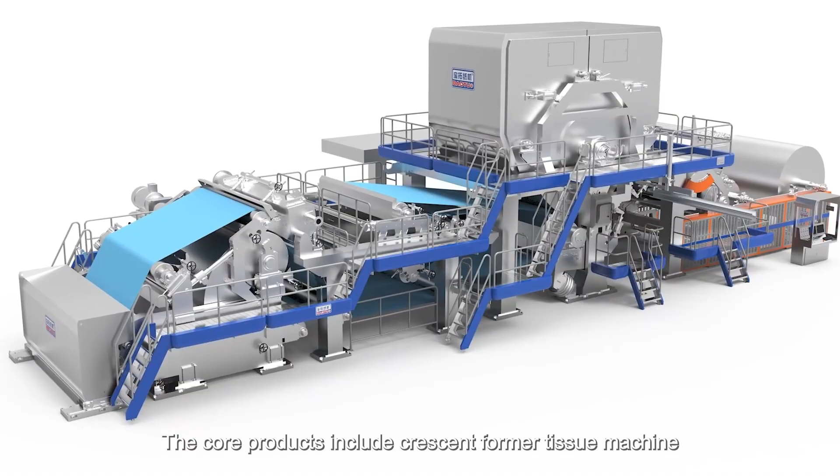Baotuo Company was established in 2007. It is a national high-tech enterprise under Baotuo Enterprise Group, which integrates paper-making equipment research and development, manufacturing, sales, installation, and commissioning services. The core products include Crescent Former Tissue Machine, Section Former Tissue Machine, Fourdrinier Twin Dryer Tower Machine, TAD Hot Air Penetration Multifunctional Tissue Machine, and Textured Tissue Machine.

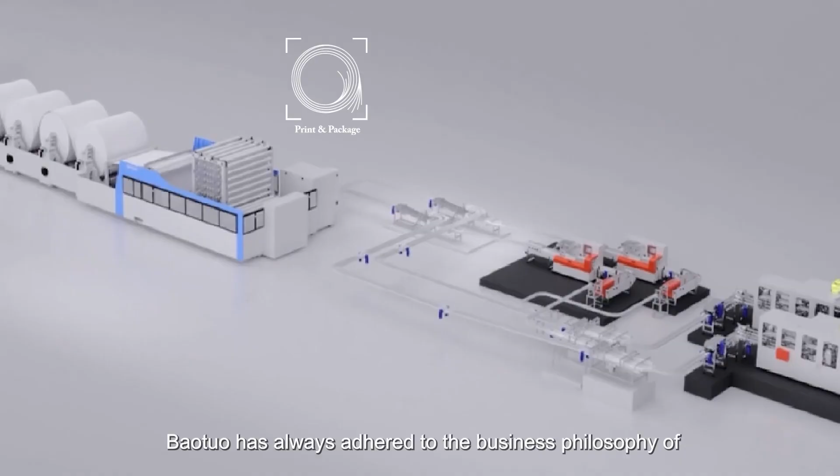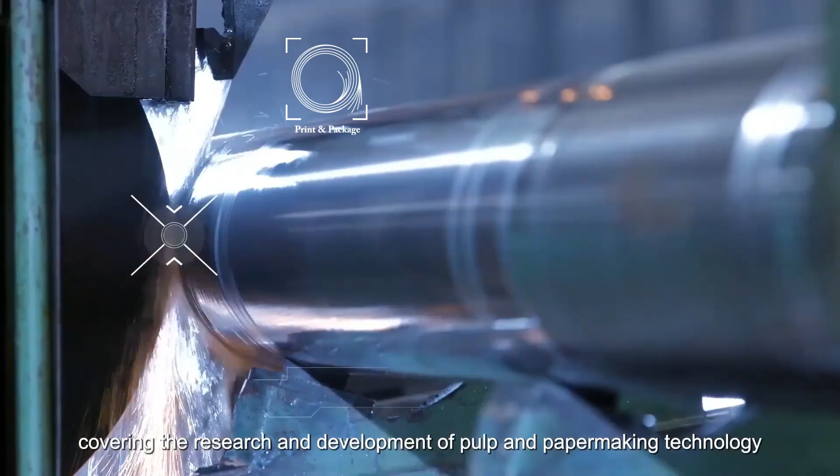Since its establishment, Baotuo has always adhered to the business philosophy of science and technology as treasure, innovation and development, constantly absorbing and learning from the world's advanced technology, while also making independent innovations. It has more than 80 patents covering the research and development of pulp and paper making technology, the development of complete paper making equipment and core key components.

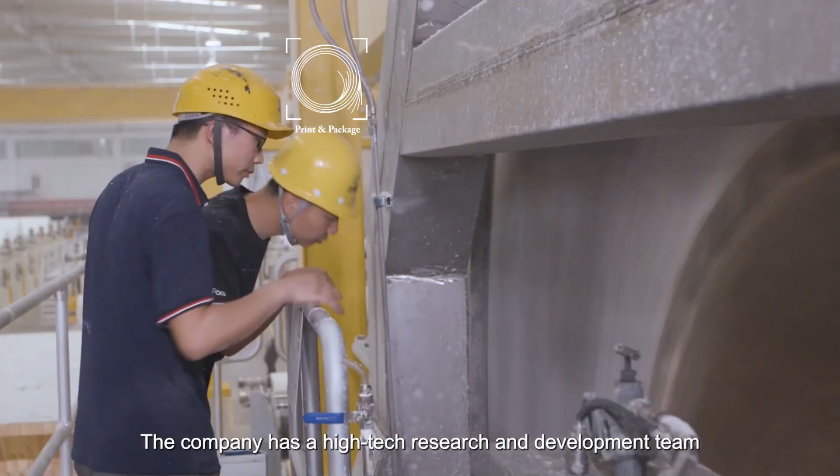In 2022, Baotuo Company was honored as National Invisible Champion of Nanhai Manufacturing Industry. The company has a high-tech research and development team, more than 200 sets of successful experience in paper machine projects, focusing on continuous research and development and upgrading of paper-making equipment and processes, and has won a lot of praise and trust from customers at home and abroad.

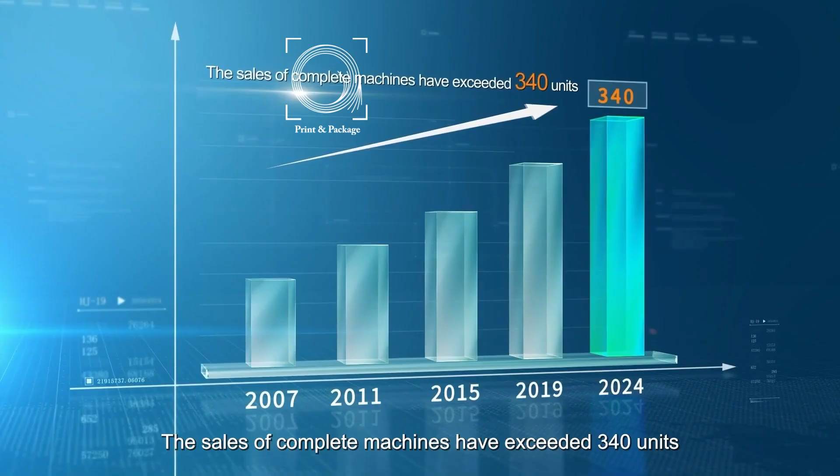The sales of complete machines have exceeded 340 units, and the annual output of total installed machines has reached 5.6 million tons. Baotuo ranks third in global market share of main tissue machine suppliers from 2000 to 2025.

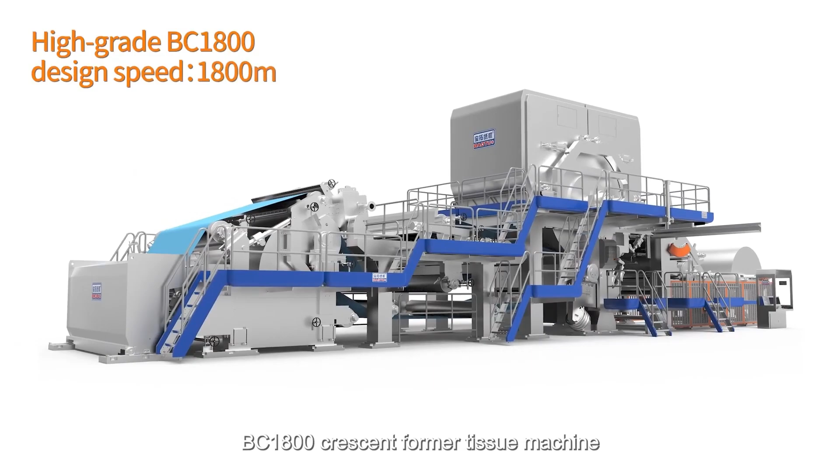At the beginning of 2021, Baotuo developed and launched the high-grade BC1800 Crescent Former Tissue Machine. The design speed of this machine is 1800 meters per minute. The base paper width is 2,850 to 5,600 millimeters. The production weight is 11 to 42 grams per square meter. The maximum annual output can reach 55,000 tons.

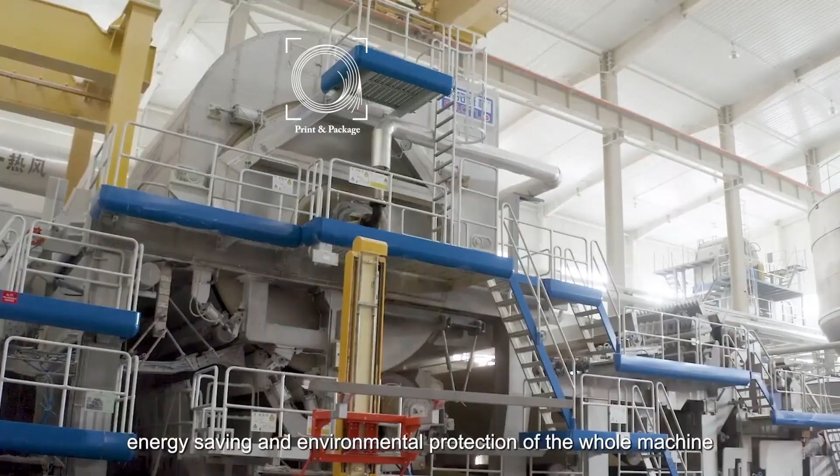This model has been put into production in Hengan Group, Zhongshun Group, Sun Group, Asia Pacific, and other domestic large-scale household paper enterprises. The operation performance, product quality, energy saving, and environmental protection of the whole machine have been highly praised by experts and customers. The performance has reached the international advanced level.

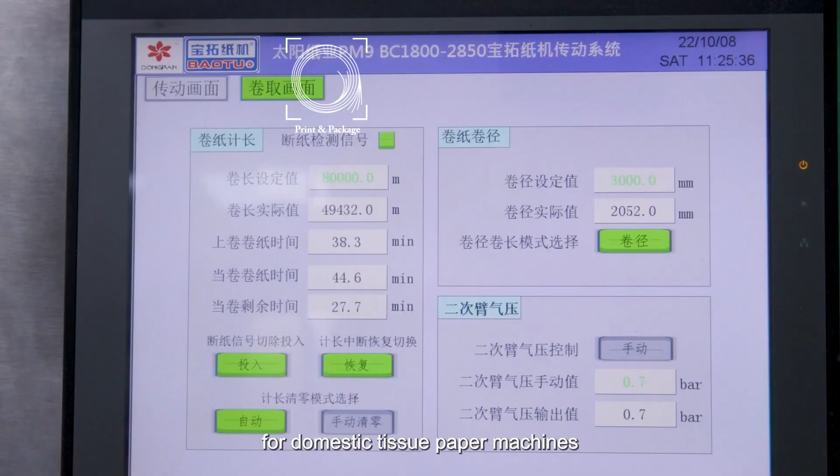Guangxi Sun Paper ordered 2 BC1800-2850 Crescent paper machine production lines from our company, which have been successfully put into production in July 2022. In less than a month, the operating speed of the paper machine broke through 1,700 meters per minute, creating the highest operating speed record for domestic tissue paper machines. The successful operation of this project has filled the vacancy in the domestic industry and created a wide range of social and economic benefits. The production line consists of pulp preparation and main tissue machine.

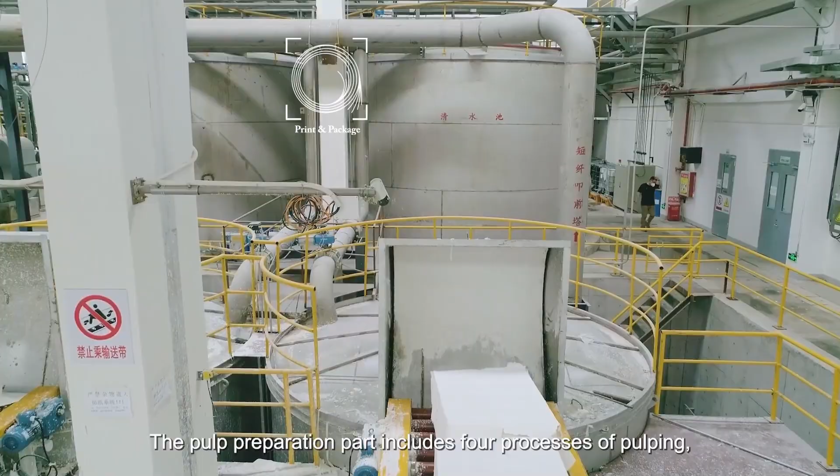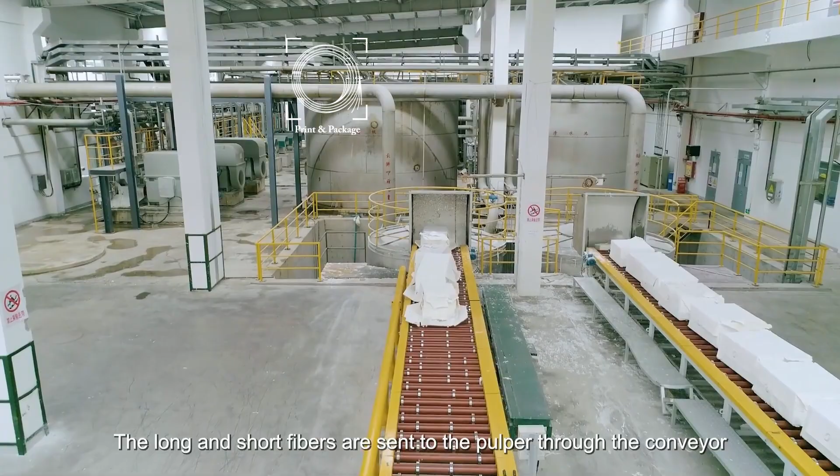1. Pulp preparation. The pulp preparation part includes 4 processes: pulping, sand removal, pulp refining, and pulp blending. Pulping: the long and short fibers are sent to the pulper through the conveyor. Under the power of the pulper impeller, the pulp in the tank is sucked along the center of the axis.

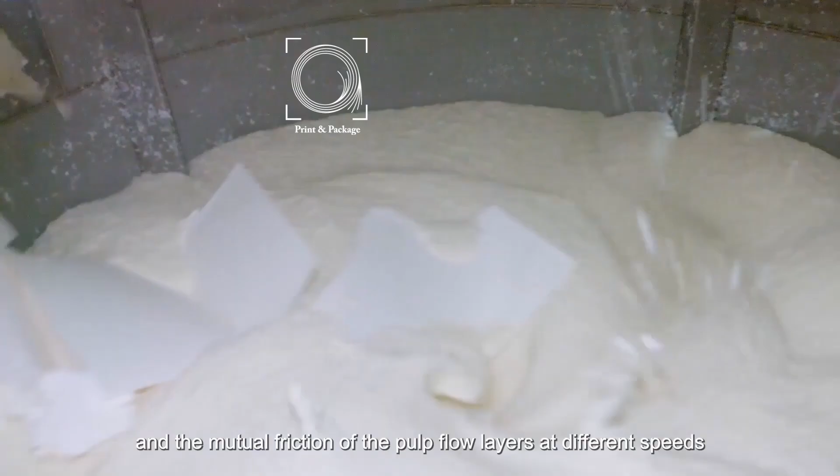The pulp is thrown out from the circumference at high speed, forming a violent, turbulent cycle due to the tearing of the pulp plate by the impeller and the mutual friction of the pulp flow layers at different speeds. The purpose of pulp separation is achieved. The pulping concentration and pulping time determine the degree of disentanglement of the pulp. The crushed pulp is sent to the pulp tower before the beating through the pulp pump.

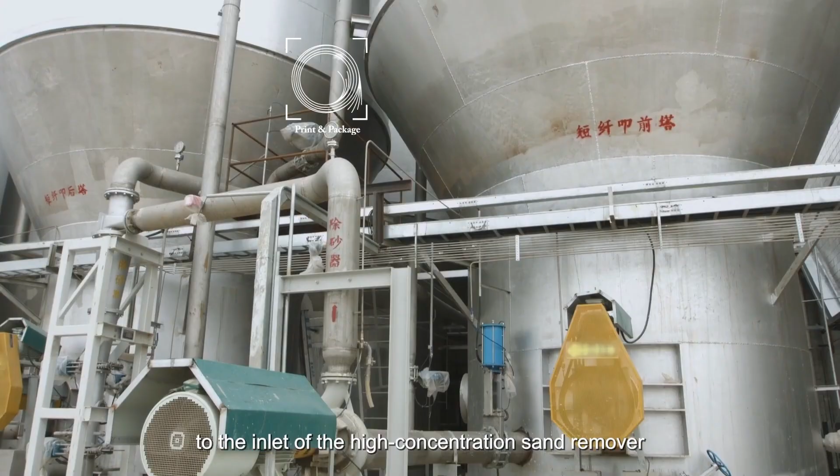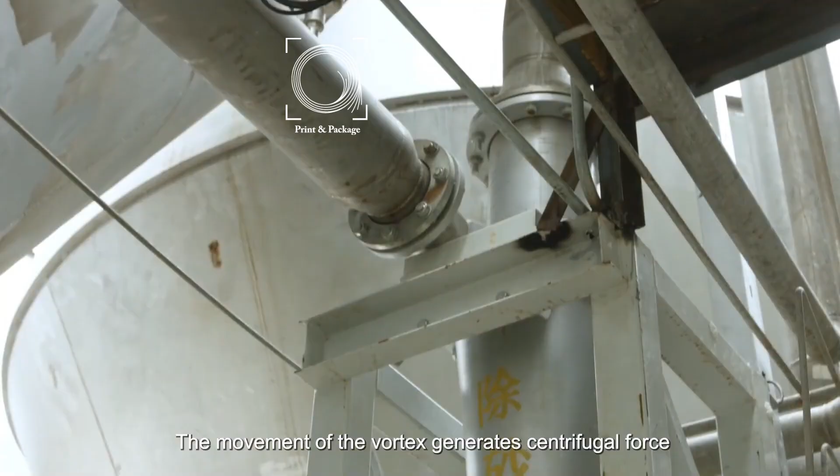Sand removal: the slurry is transported tangentially to the inlet of the high-concentration sand remover. The slurry moves in a vortex and accelerates downward along the cone of the cleaner in a spiral shape. The movement of the vortex generates centrifugal force. Impurities heavier than water move to the inner wall of the slag cleaner and drop to the sand removal port, while the good pulp with a density lower than water moves to the core of the vortex and is sent from the good pulp outlet to the next process, refining.

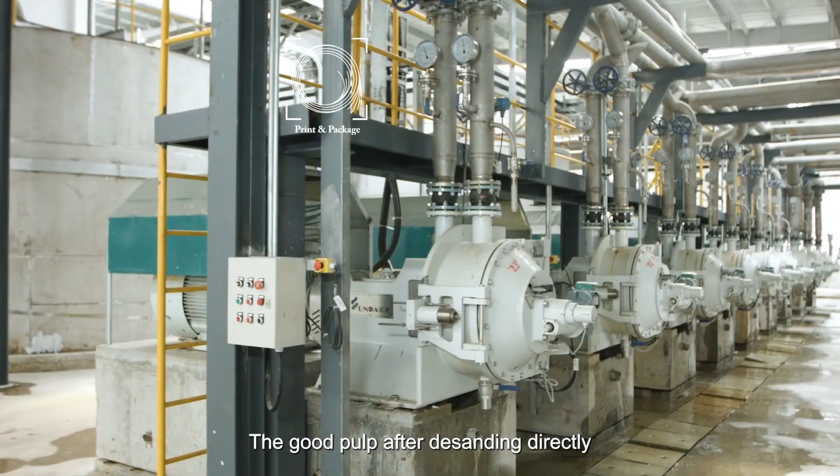The good pulp, after desanding directly, enters the grinding area of the refiner. The beating process is completed through the rubbing and extrusion of the tooth disc in the grinding area, and the pulp after grinding enters the beating tower. According to the refining capacity, refining power and refining concentration are important factors to determine the degree of beating.

Pulp blending: the tapped pulp and multi-disc recovered pulp are pumped to the pulp blending tower according to the production process ratio. After mixing evenly in the slurry mixing tower, it is transferred to the front tower through the slurry pump. 2. Paper machine part.

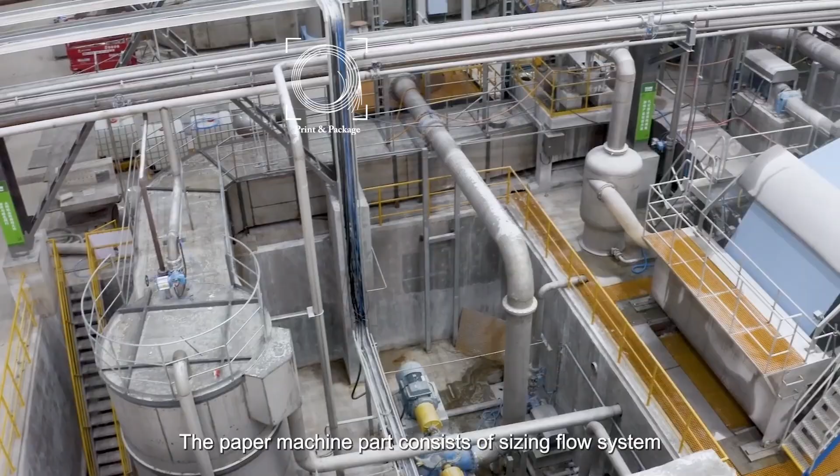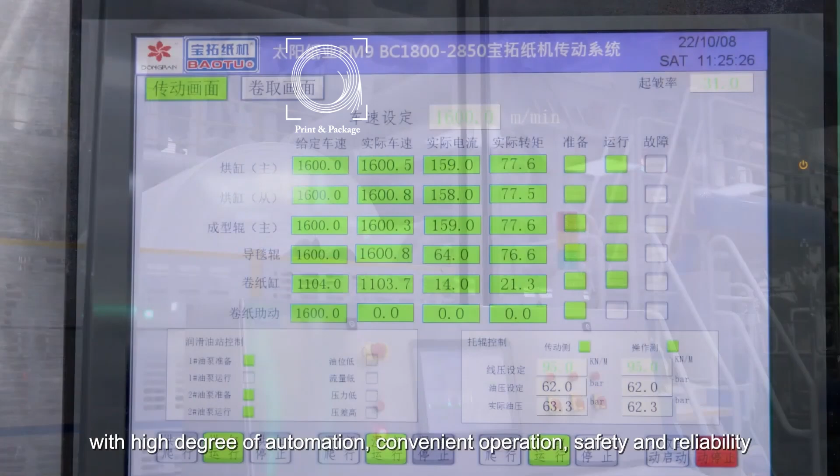The paper machine part consists of sizing flow system, head box, crescent former, press section, steel dryer, air hood and heat recovery system, dryer cylinder scraper, rewinder, lubrication system, hydraulic control system, main drive control system, and vacuum system. The whole machine is controlled by DCS with a high degree of automation, convenient operation, safety and reliability.

Sizing flow delivery system. The sizing flow delivery system consists of sizing pump, flushing pump, pressure screen, second stage screen, and white water tower outside the machine.

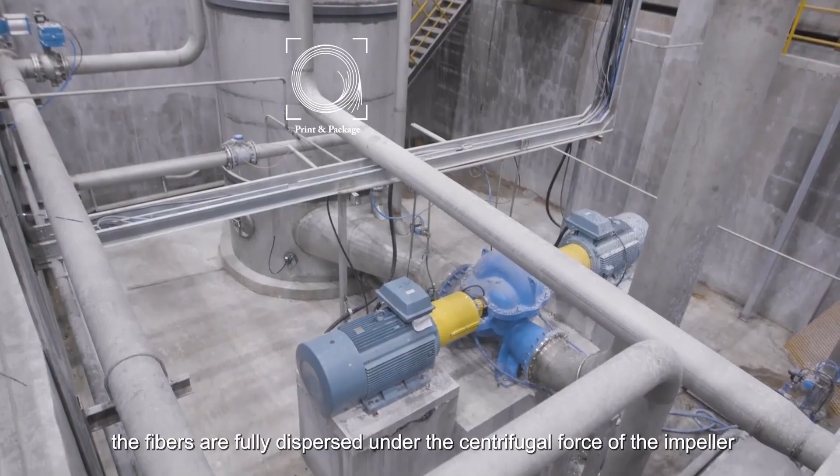The slurry in the forebay is sent to the inlet of the slurry pump after thickening. After the pump is mixed and diluted with white water outside the machine, the fibers are fully dispersed under the centrifugal force of the impeller of the pulp pump and then enter the pressure screen. The good pulp, after the pressure screen treatment, finally enters the head box.

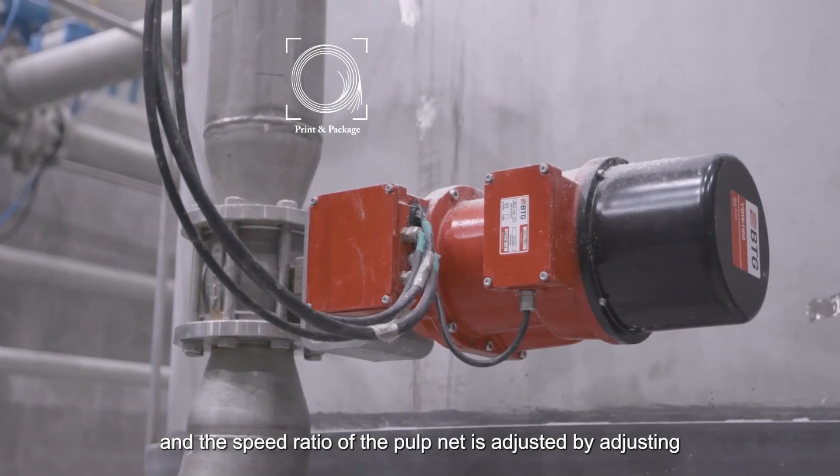The pulp pump is controlled by frequency conversion, and the speed ratio of the pulp net is adjusted by adjusting the frequency of the pulp pump to meet the evenness of the base paper and the vertical and horizontal tensile strength.

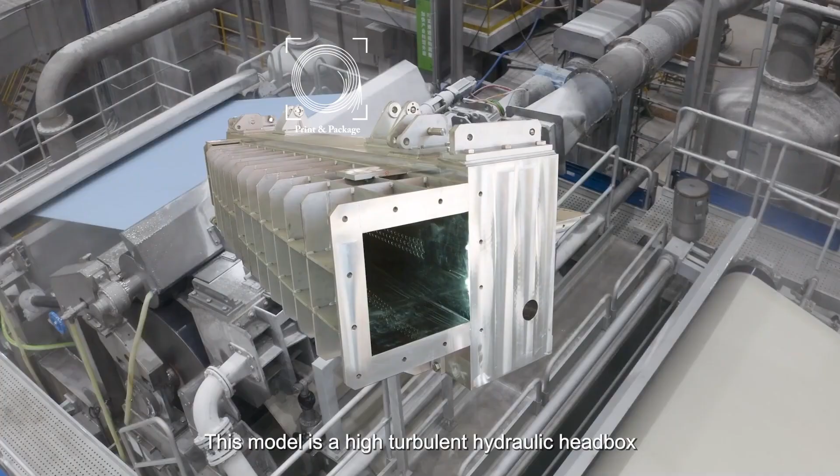Head box. The head box is the heart of the paper machine, the key component of the paper machine, and the hub connecting the flow delivery part and the forming part. This model is a high turbulent hydraulic head box composed of three parts: pulp distributor, rectification unit, and net-entering device.

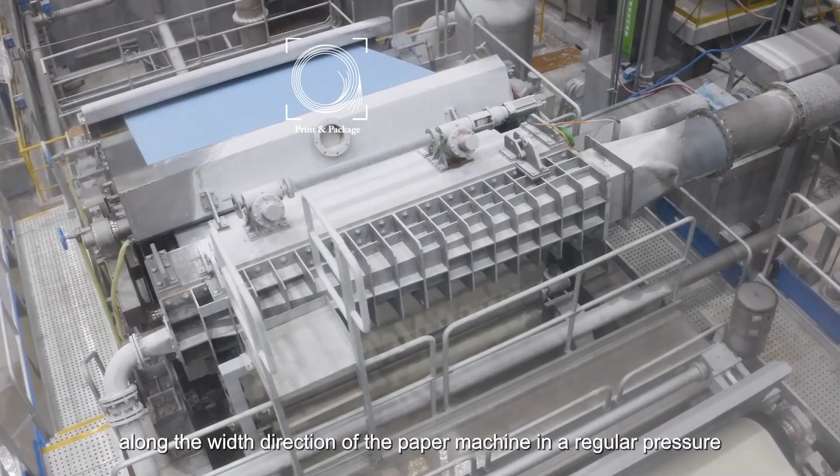According to the principle of fluid dynamics, the pulp distributor uses a regular variable cross-section to distribute the net paper material flow along the width direction of the paper machine in a regular pressure, speed, and flow rate.

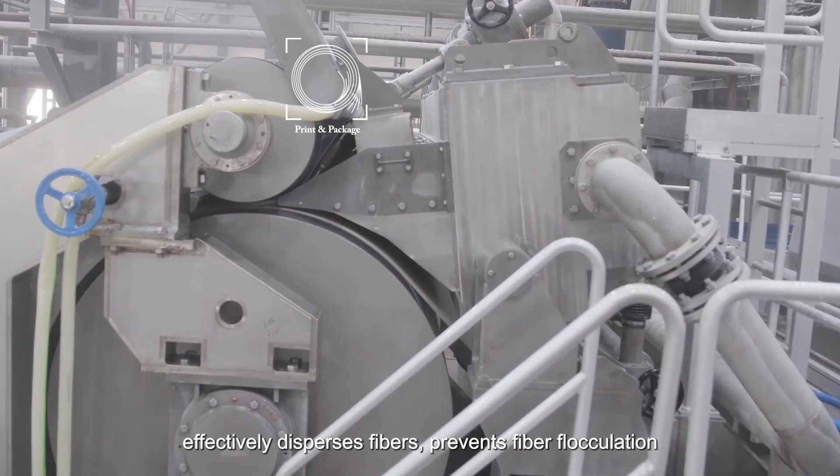The rectifying part uses rectifying elements and turbulence generators to generate turbulence of appropriate scale and intensity, effectively disperses fibers, prevents fiber flocculation, keeps fibers in a random arrangement as much as possible, and keeps fibers in the web material flow in a uniformly dispersed state.

The paper material feeding device spreads the slurry evenly to the predetermined network point at the best spraying speed. The parts in contact with the headbox and the slurry are all made of stainless steel 316. The main flow parts of the head box are processed and formed at one time by the pentahedron machining center.

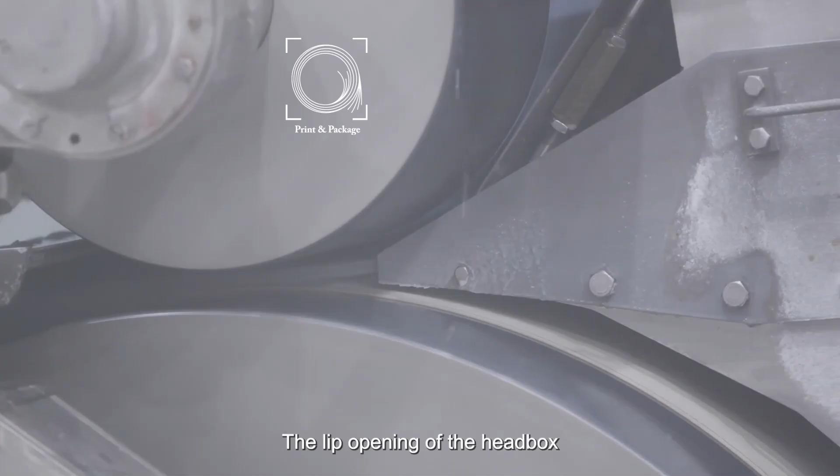The lip opening of the head box and the return flow of the head box are controlled electrically. The landing point of the head box is adjusted online by a worm gear. The head box can be adjusted online to meet the quantitative requirements of the base paper.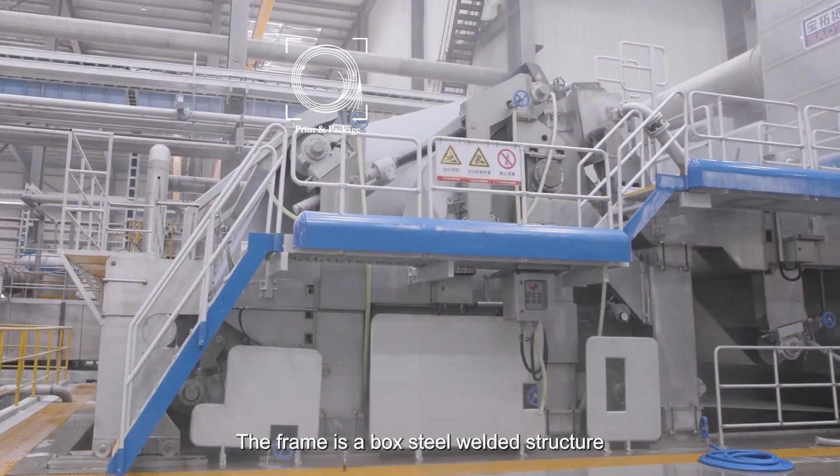Crescent former. The crescent former adopts four-roller cantilever structure. The frame is a box steel, welded structure, and the vertical and horizontal beams and the frame base are covered with stainless steel. The wire section adopts the electric method to tension and relax the forming wire.

It is equipped with a constant tension device to ensure the stability of the tension during the running of the wire, and adopts the pneumatic method to automatically correct the deviation of the polyester wire.

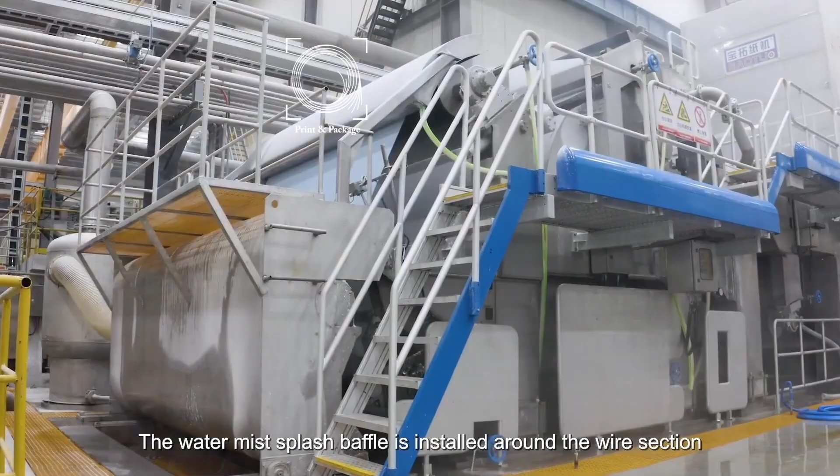The water receiving tray under the net is equipped with a curved deflector, which can eliminate part of the foam in the white water. The water mist splash baffle is installed around the wire section, and the rear of the forming section is equipped with a movable adjustable water cover, which is connected with the dehumidification system so as to improve the operating environment of the workshop.

Felt press section. The felt section includes forming rollers, vacuum rollers, felt guide rollers, vacuum section boxes, felt correction devices, felt tensioning devices, guide roller scrapers, high and low pressure spring systems, etc.

The frame is a box steel welded structure, and the vertical and horizontal beams and the frame base are covered with stainless steel. The forming roller frame has a cantilever design.

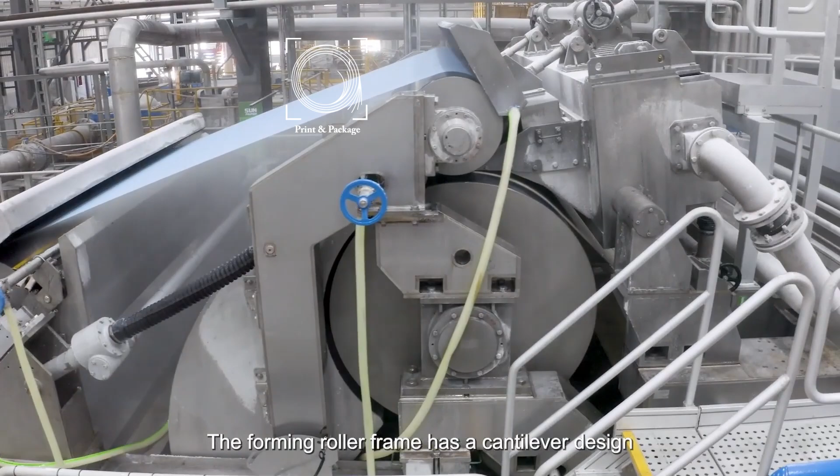When changing a blanket, use a hydraulic jack to lift the operating side frame and take out the plug block, and then the blanket can be changed directly, which effectively reduces the labor intensity of employees and saves the time for changing blankets. The forming roller adopts a large diameter,

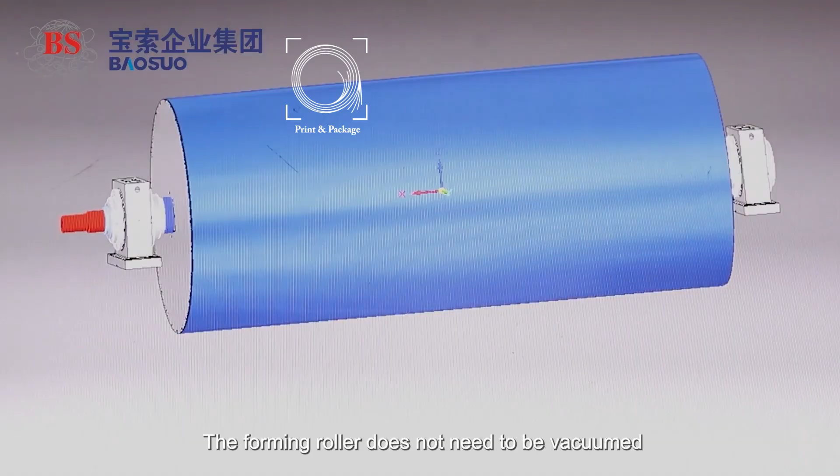1,500 millimeters, grooved roller body to increase the dehydration capacity of the wet part. The roller body is rolled and welded by steel plate, and the inside and outside are finished to meet the requirements of dynamic balance. The forming roller does not need to be vacuumed and is naturally dehydrated by centrifugal force, so as to achieve the purpose of energy saving.

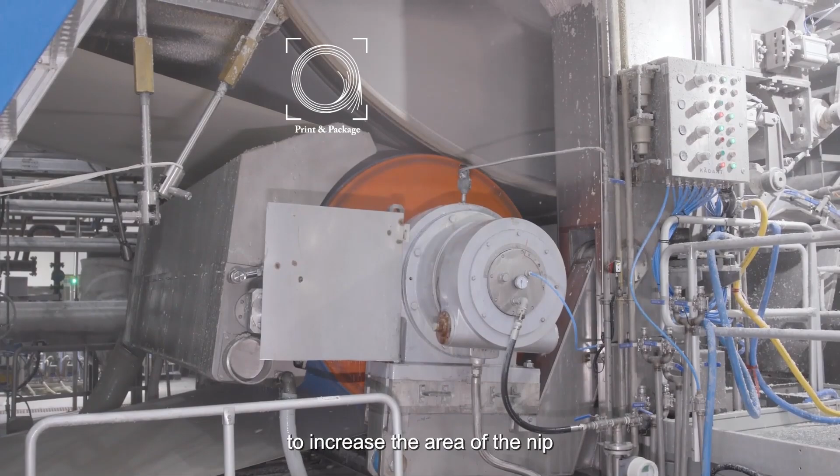The vacuum roller adopts a large diameter, 1,450 millimeters roller body to increase the area of the nip. The width of the nip reaches 46 millimeters, and the dryness of the upper cylinder is guaranteed to be above 40%. The application of large diameter vacuum rollers can not only reduce steam consumption, but also increase the bulk of the finished paper.

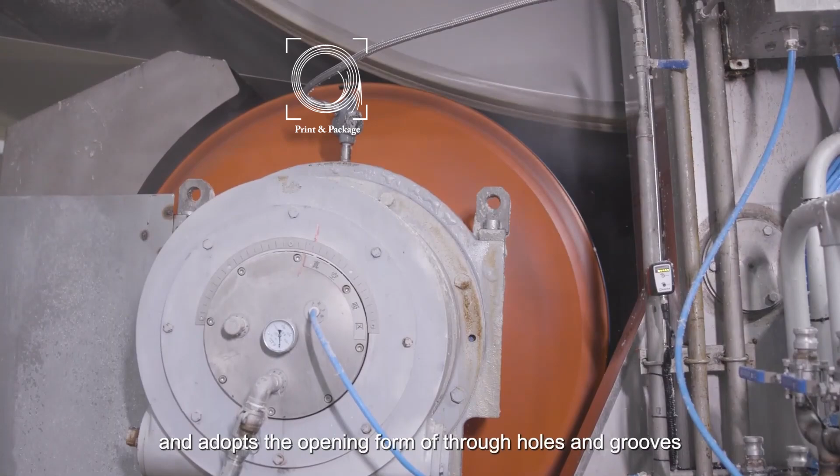The roller body and the core body are all made of stainless steel. The roll-covering rubber is made of imported polyurethane material and adopts the opening form of through holes and grooves.

The opening rate of the rubber surface reaches more than 20%, which increases the dehydration capacity. The roller seals are made of imported graphite-dense material, which effectively reduces the resistance caused by the friction between the roller shell and the seals, effectively reduces the operating load of the main drive of the paper machine, and prolongs the service life of the rollers.

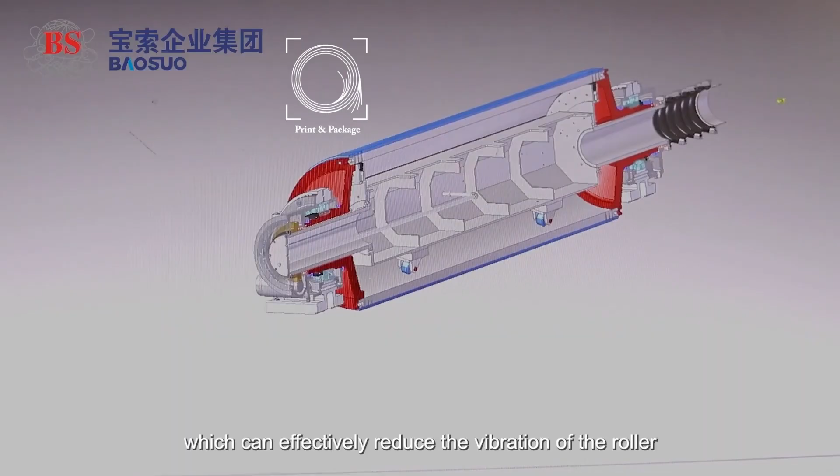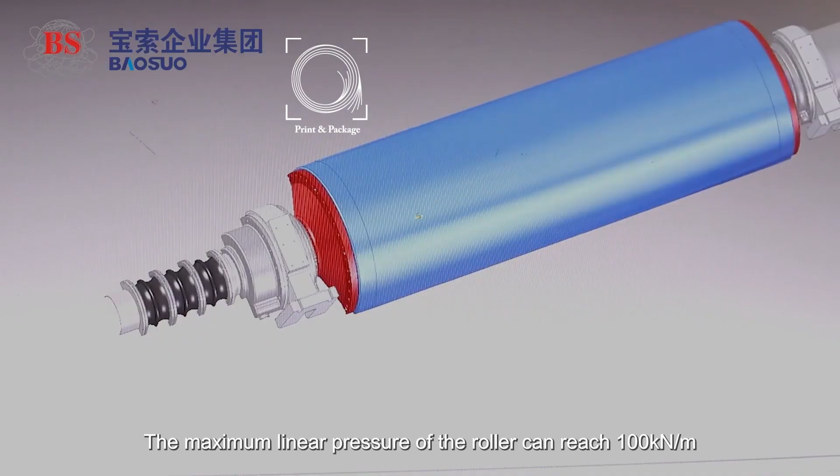The vacuum roller adopts a hydraulic loading method, which can effectively reduce the vibration of the roller and provide a strong guarantee for the stable operation of the paper machine. The maximum linear pressure of the roller can reach 100 kilonewtons per meter, which effectively improves the dryness of the upper cylinder of the paper sheet.

The vacuum roller adopts the design of the double scraper structure water tray, which solves the problem of paper sheet rewetting and improves the dryness of the paper sheet upper cylinder.

The blanket suction box adopts a ceramic panel, which reduces the friction between the blanket and the panel, thereby improving the service life of the blanket and the panel of the vacuum suction box.

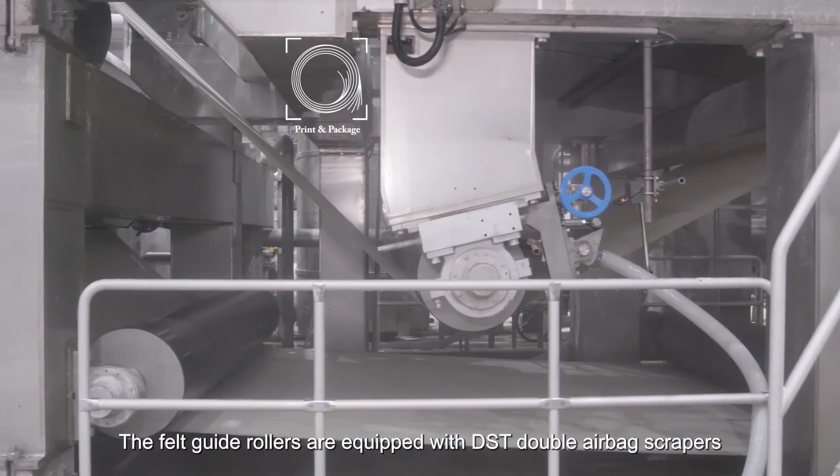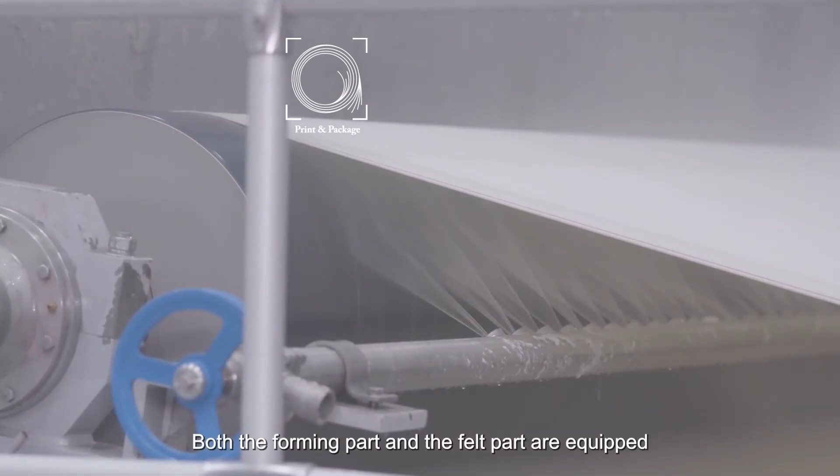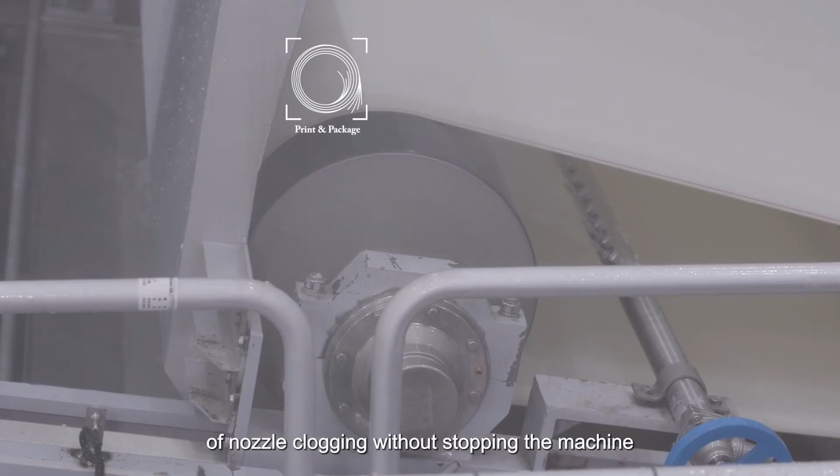Both the forming part and the felt part are equipped with high and low pressure brushable spray pipes. It can effectively solve the problem of nozzle clogging without stopping the machine. It effectively guarantees the cleanliness, air permeability, and water content of the net blanket, so that the net blanket always maintains a good dehydration state. It not only improves the service life of the net blanket, but also reduces the cleaning frequency of the net blanket and improves the operating efficiency of the paper machine.

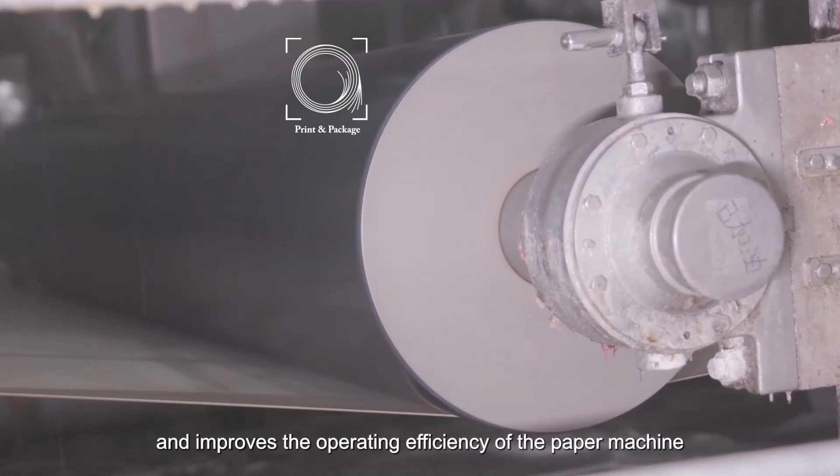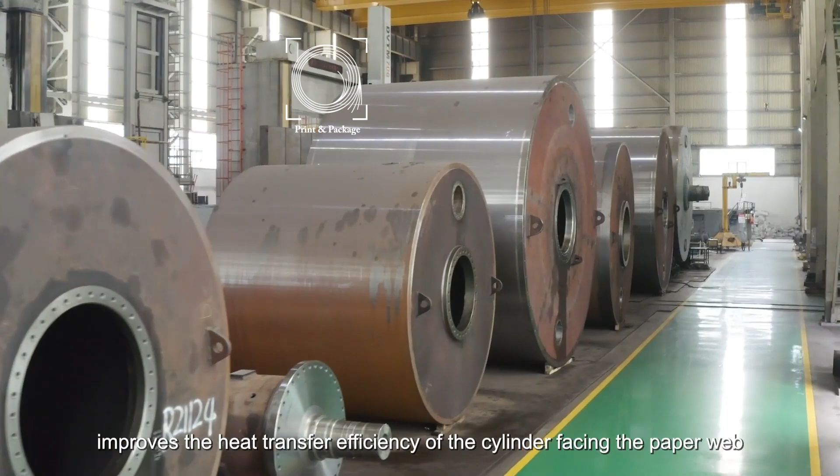Steel drying cylinder: the paper machine is equipped with a steel drying cylinder with a diameter of 4,877 millimeters. The cylinder body is made of Q345R steel plate with a groove design inside, which reduces the area occupied by condensed water, improves the heat transfer efficiency of the cylinder facing the paper web, and effectively reduces the steam consumption. The cylinder surface is sprayed with imported special alloy.

The Rockwell hardness of the cylinder surface is in the range of 55 to 65. Under normal use, the metal-coated cylinder surface does not need maintenance within 5 years. The flat welded end cover does not have to worry about steam leakage, and it also reduces the operating load of the main drive of the dryer.

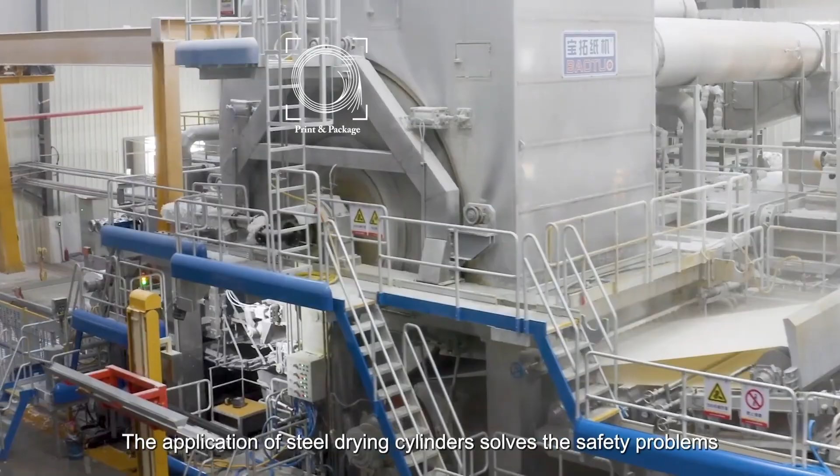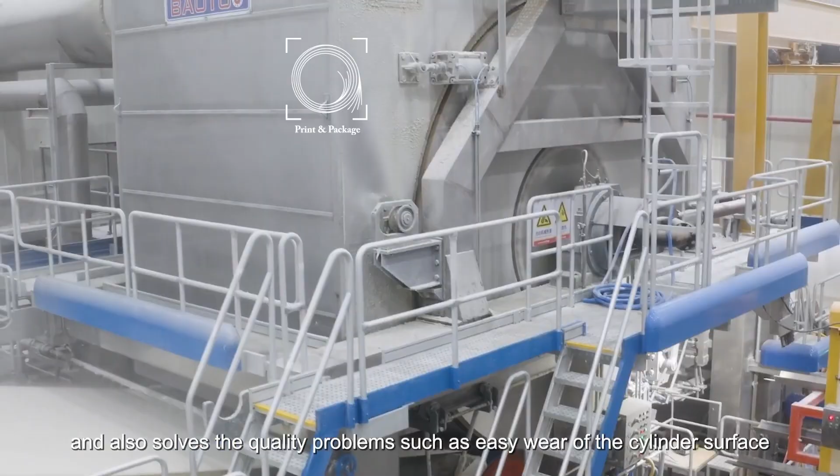The application of steel drying cylinders solves the safety problems of using cast iron drying cylinders, and also solves quality problems such as easy wear of the cylinder surface and steam leakage of the end cover. It not only improves the heat transfer efficiency and reduces the steam consumption per ton of paper to 2 tons, but also achieves the effect of increasing the production rate and achieving good economic benefits.

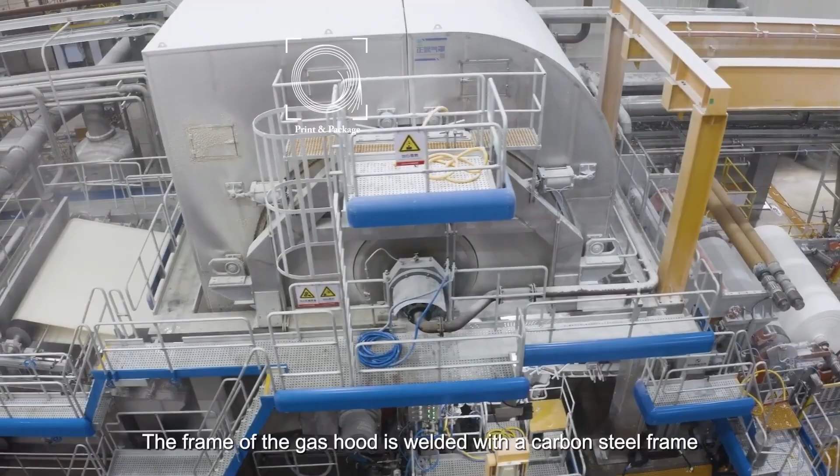The frame of the gas hood is welded with a carbon steel frame, and the internal air duct and blowing box of the gas hood are made of stainless steel, which not only ensures that the gas hood is not easily deformed, but also ensures the service life of the gas hood.

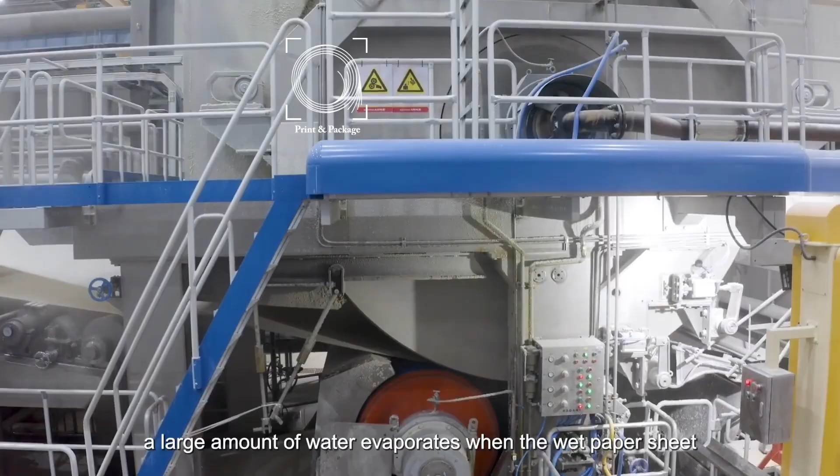When the paper sheet leaves the vacuum roller, a large amount of water evaporates when the wet paper sheet touches the surface of the Yankee cylinder, and a large amount of moisture is generated at the same time. In order to reduce moisture leakage or entering the air hood to affect drying, we have designed a wet end dehumidification box at the bottom of the wet end air hood.

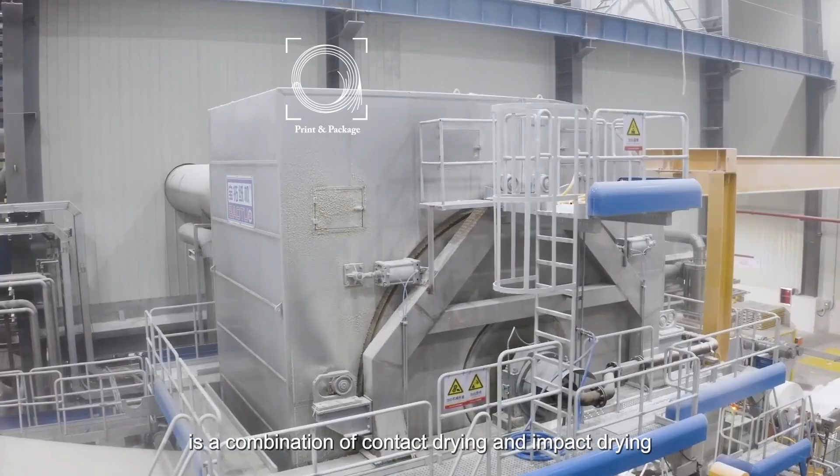The drying process of the paper sheet in the air hood is a combination of contact drying and impact drying. On the one hand, the Yankee cylinder continuously transfers heat to the paper, and on the other hand, the high-speed airflow generated by the gas hood nozzle continuously impacts the surface of the paper. Under the action of the high-speed airflow, the moisture on the paper will evaporate at an accelerated rate.

Due to the difference in paper dryness and drying environment between the wet end air hood and the dry air hood, the drying rate of the paper is also different.

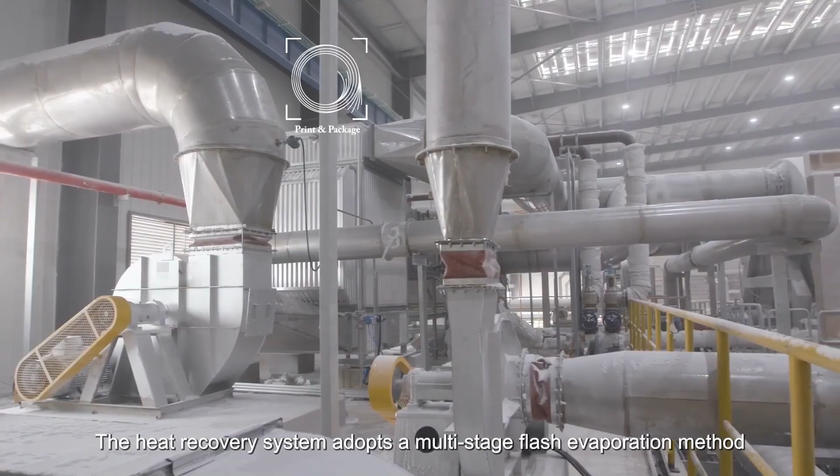We have configured 2 sets of independent air intake systems to reasonably distribute heat energy input to achieve the purpose of energy saving. The heat recovery system adopts a multi-stage flash evaporation method, which makes full use of the difference in enthalpy and temperature of the flash steam, and is equipped with a corresponding waste heat recovery device, equipped with a new high-efficiency adjustable heat pump.

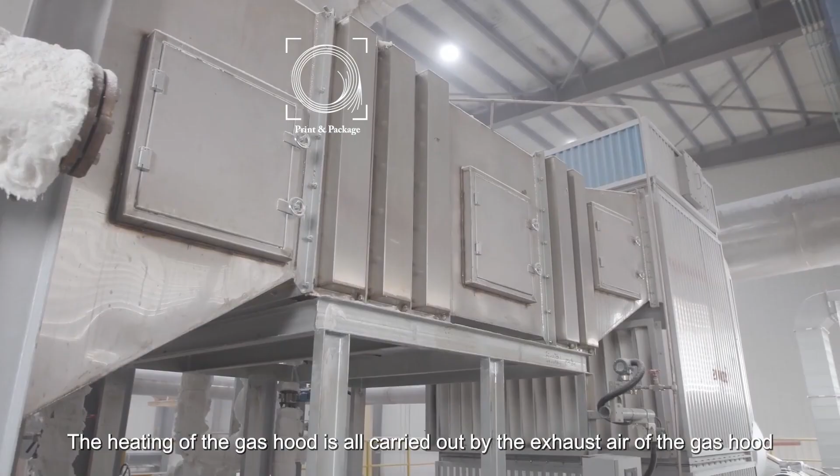The primary flash steam is pressurized and cycled to promote the smooth discharge of condensate from the drying cylinder. The heating of the gas hood is all carried out by the exhaust air of the gas hood. The condensed water discharged from the drying cylinder and the multi-stage flash steam undergo cascade heating, and the multi-stage waste heat is fully recovered to achieve the purpose of saving steam.

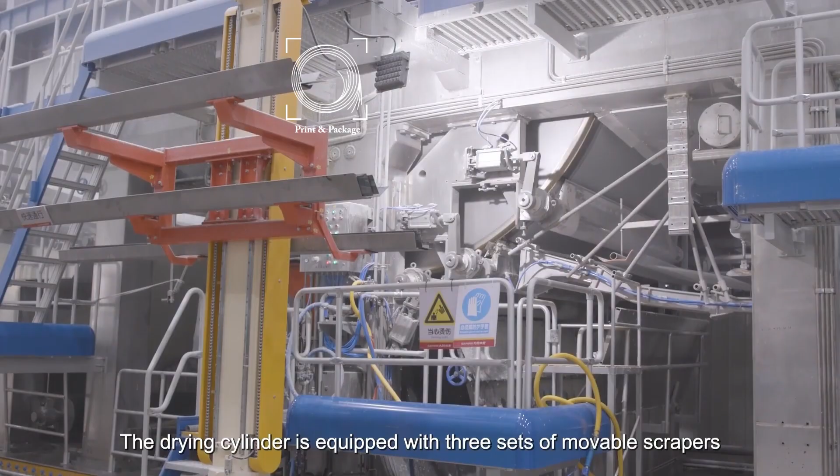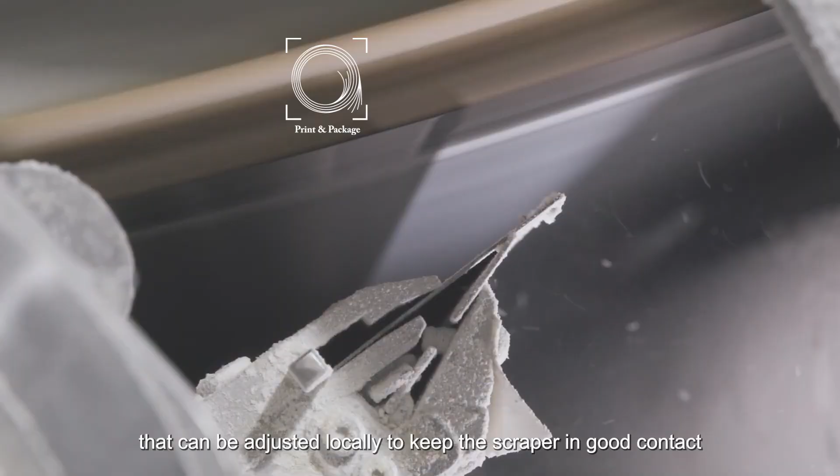Dryer scraper. The drying cylinder is equipped with three sets of movable scrapers, which are respectively used for paper breaking, scraping, and cleaning the surface of the cylinder. In order to reduce the risk of scraper damage to the cylinder surface, we have selected a flexible scraper clip that can be adjusted locally to keep the scraper in good contact with the cylinder surface, reduce blade vibration, prolong the service life of the scraper blade, and reduce the frequency of blade replacement. This can greatly increase the efficiency of the paper machine.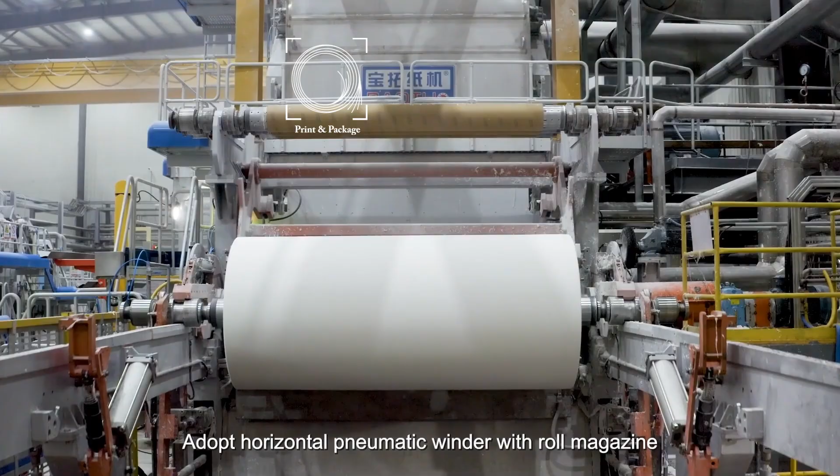Winding machine. Adopt horizontal pneumatic winder with a roll magazine. It is mainly composed of a reel cylinder device, roll take-up device, reel roller starting device, primary arm and transmission device, secondary arm, paper reel cylinder scraper, and paper roller buffer brake device.

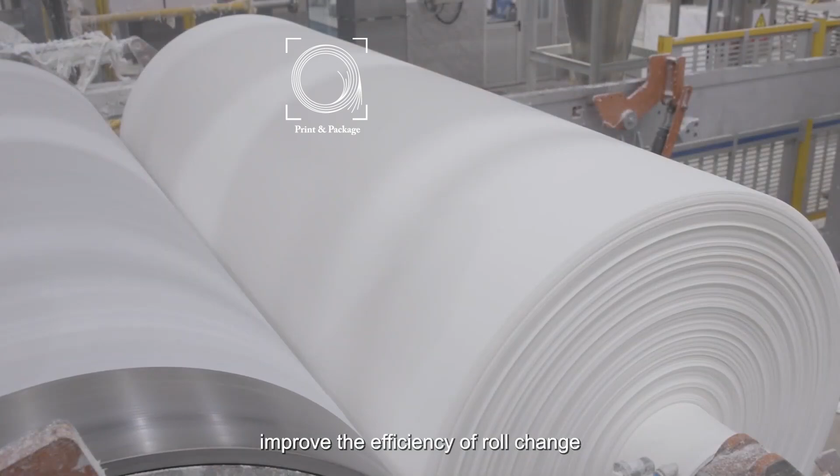It can realize the function of automatic roll change, improve the efficiency of roll change, and eliminate the safety risks of manual operation. Paper roll diameter, phi 2500 mm. Roll paper length, diameter, and density can be adjusted online.

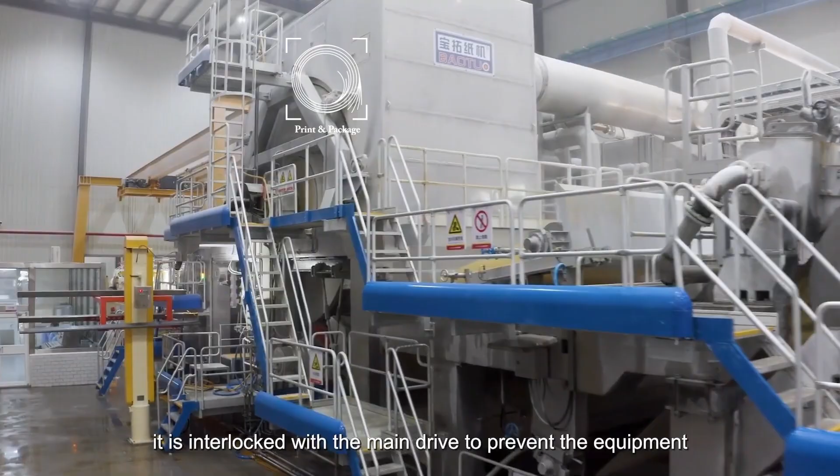Lubrication system and hydraulic control system. The lubrication system mainly supplies oil to the dryer gearbox, dryer bearings, and roller bearings in a centralized manner, and is connected to the DCS control system to monitor the oil temperature and oil volume online. At the same time, it is interlocked with the main drive to prevent the equipment from working in an oil-free state and ensure the service life of related bearings.

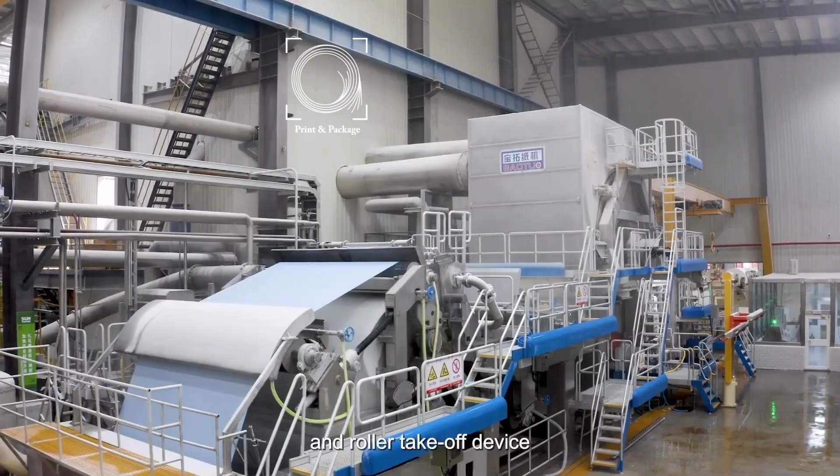The hydraulic system supplies oil to the roller pressurization and roller takeoff device, fully guaranteeing the stability, synchronization, and accuracy of the line pressure of the roller under the high-speed operation of the paper machine.

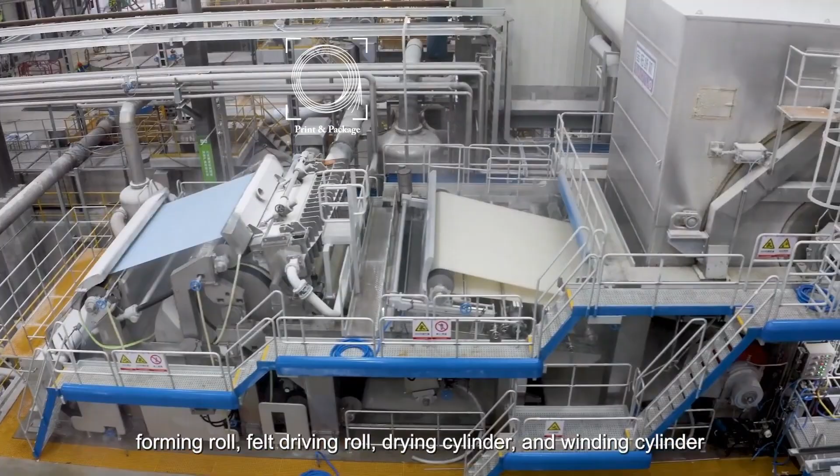Main drive control system. There are 4 transmission points in the main drive of the paper machine: forming roll, felt driving roll, drying cylinder, and winding cylinder. Load distribution and speed interlocking are designed according to equipment operation requirements. The driver adopts ABB series frequency converter, which has the characteristics of complete protection function, excellent starting performance, simple and smooth speed regulation process, high degree of automation, safety and reliability.

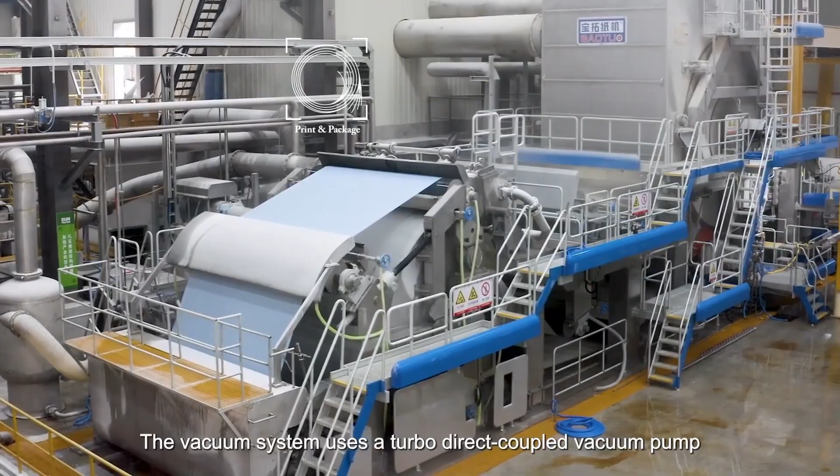Vacuum system. The vacuum system uses a turbo direct-coupled vacuum pump. It mainly provides reasonable vacuum pumping capacity and vacuum degree for vacuum rollers and felt suction boxes.

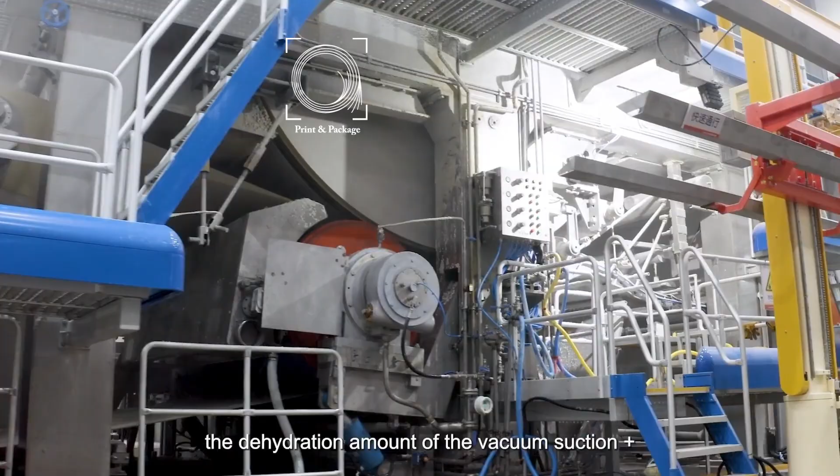During the research and analysis of the vacuum system of the paper machine, the drying rule of the paper sheet should be followed. The total amount of water in the dehydration and drying of the paper sheet equals the dehydration amount of the press plus the dehydration amount of the vacuum suction plus the evaporated water amount. The greater the amount of vacuum suction water, the more beneficial it is to reduce the amount of dehydration in the press and reduce the transmission load of the paper machine.

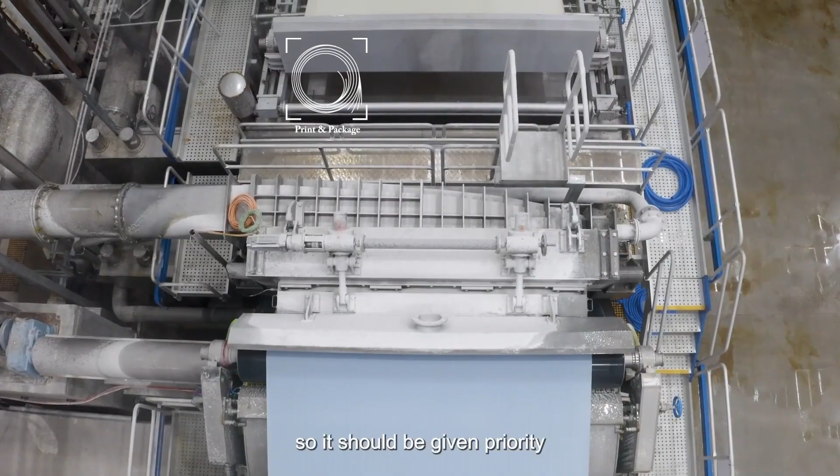Compared with the vacuum suction, press dehydration uses low energy consumption and has high efficiency, so it should be given priority. Therefore, a reasonable amount of vacuum suction is an important measure to reduce energy consumption.

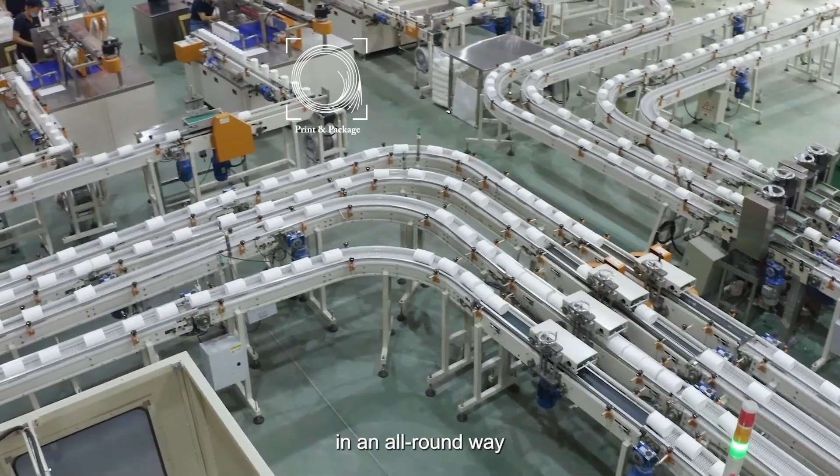Baotuo Paper Machine Series covers the current tissue paper making equipment series products, which can meet the production needs of different customers to the greatest extent. Cooperate with Baotuo Enterprise Group's post-processing equipment and packaging equipment to create a more intimate overall solution for household paper projects in an all-round way, and wholeheartedly create higher value and experience for customers.

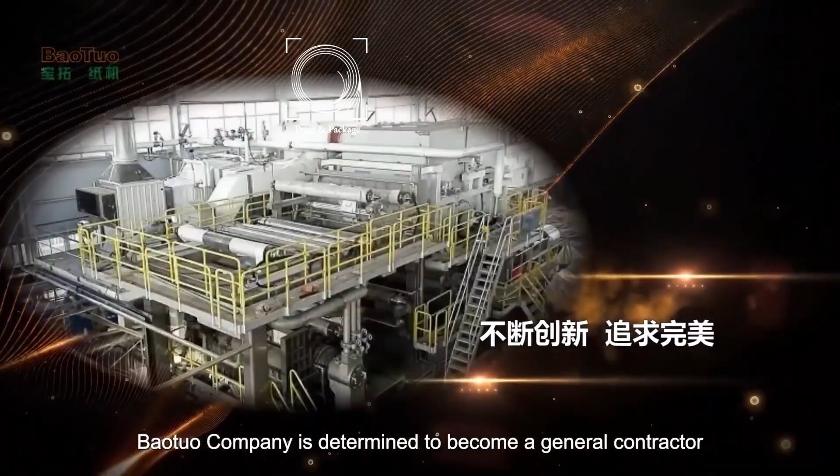See the opportunity, pioneer and innovate, and unite as one, looking forward to the future. Baotuo Company is determined to become a general contractor in the international paper-making equipment industry with ingenuity, establish a famous brand in the household paper industry, and provide low-energy, safe and stable production equipment for global household paper companies.

Baotuo Paper Machine, continuous innovation. Do not forget the original intention. Continue to move forward.

Facing the development opportunities and challenges under the new situation, Baotuo will strengthen its contribution to the household paper industry and its customers, and combine with Baotuo Enterprise Group to create a more considerate overall solution provider for the global tissue machine industry.